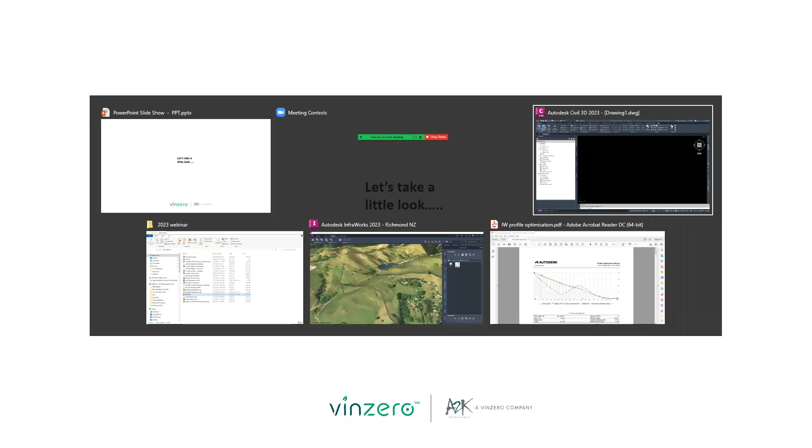All right, and in Infraworks, this command search, cloud credit items have been removed, which is cool, and a few interoperability improvements to Inventor and the like. So we'll go and have a look through those. So let's take a little look, shall we? First of all, Civil 3D 2023.

There has been up till now no ANZ country kit. This morning I checked and there is, so I suspect in the last 1 or 2 days it's been released. So that's great. We've finally got the country kit with all the pipes and things in the background that we're wanting. And there have been a number of updates or improvements that I've been asking for in the country kit itself, not just Civil 3D.

I have yet to go through and see which ones have been implemented and which ones have not. I know already there's a couple I checked that have not been implemented yet. So it's always the case. About half get put in, about half don't of the things I asked for. However, over time, I guess we'll find out what those are.

The country kit though, as far as I know, there's no big changes to that. It's just been improvements and things that have been missed out previously, hopefully that have been asked for by me and other people. So let's have a look at some of these things. The first thing I want to have a look at is pressure pipes. So we're going to cover off the big ticket items first, and pressure pipes is probably one of them.

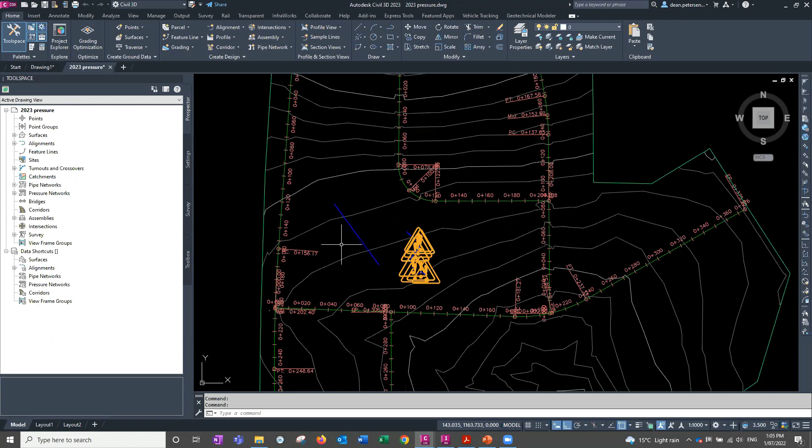pressure pipes. So when we create a long section for one of these, so I've just got a straight series of pressure pipes here. We'll connect it up. There's another one here that is running through. For those who haven't seen pressure pipes before, just quickly, let's see if we can do this.

It creates actual 3D objects, which are solids, and you can cut your long sections and things through them effectively, with joins in the corners. Better join, there you go, which are all your fittings.

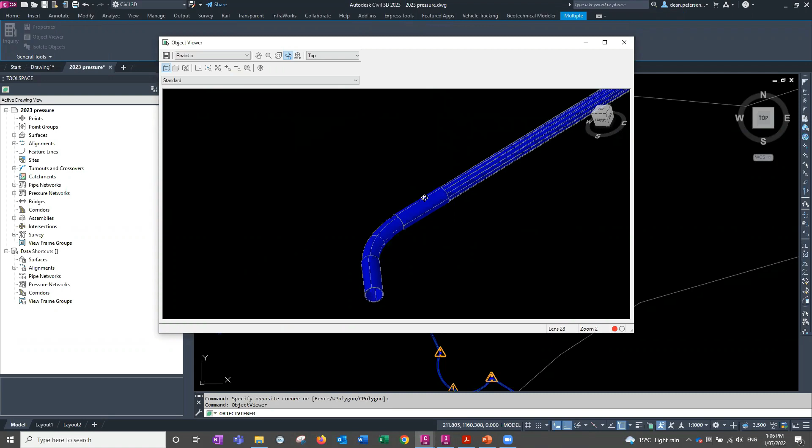If I make a long section out of these, there's a whole bunch of things in the ribbon to work with these. And if I make a profile out of this pipe run, we can tell it to maintain a depth below the ground surface based on just those fitting locations or along the cut length. Now the cut length didn't used to be modifiable before, or easily modifiable. Anyway, I'll show you where they are in just a minute.

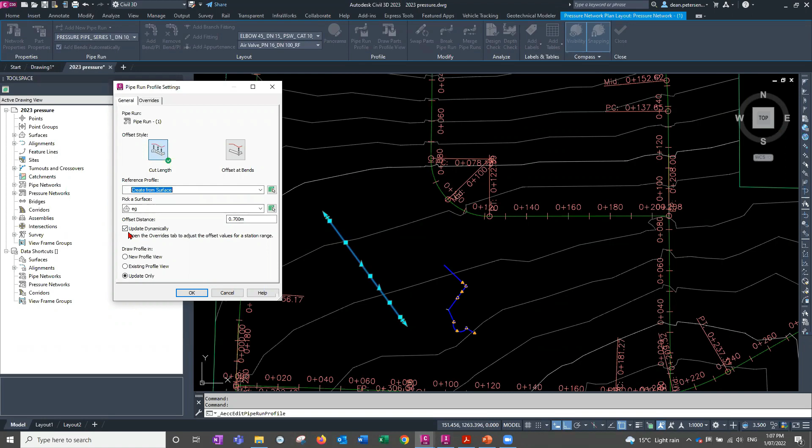So if I make a profile there, it's going to create it from the surface. It's going to be 700 down, and it wants dynamic, and we'll make a new long section. We'll go OK and accept all the defaults for now and pop it over there. So here is my long section for just a pressure pipe.

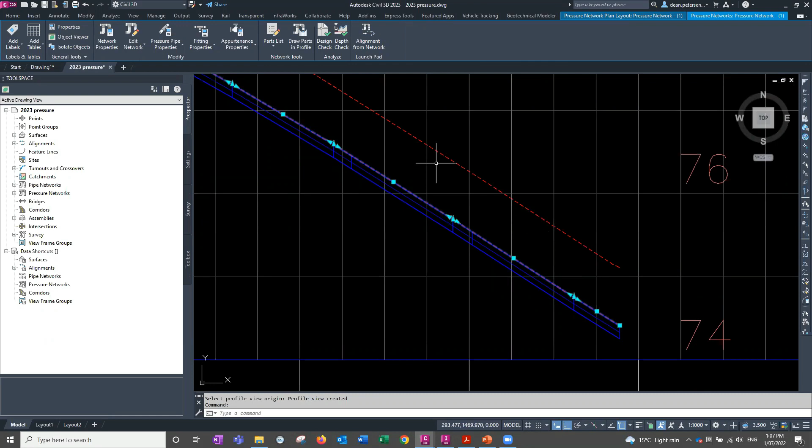Now if I select it, it's working out that 700 depth below the ground surface at the places where the pipe is cut. And there's some fittings and things in here that you're seeing as well. But it used to give you grips all the way along here, or nodes that you could adjust the level, anywhere there was a triangle in the EG surface. So you got hundreds of grips all the way along here.

And when you tried to adjust one of these things, it would often have steps in the pipes and all that sort of carry on, because there was all these other vertexes you were leaving behind, so you had to delete out a whole lot of them. But it's now not doing that, which is nice. So if I pull it down, that's easily adjustable now. What we can also do, which is new, before we do that, let's have a look at the cut lengths, where they are.

If we go into the settings tab over here, the pressure network and the parts list for the pressure network. For each of these pipes in the pressure network, edit it, there is now a, that was a fitting. Let's go back to my pressure pipes, using my PVC pipes. Edit one of these. It's now a field in here that you can set when you're creating all your pipes, or modify it for each pipe size if they're all different.

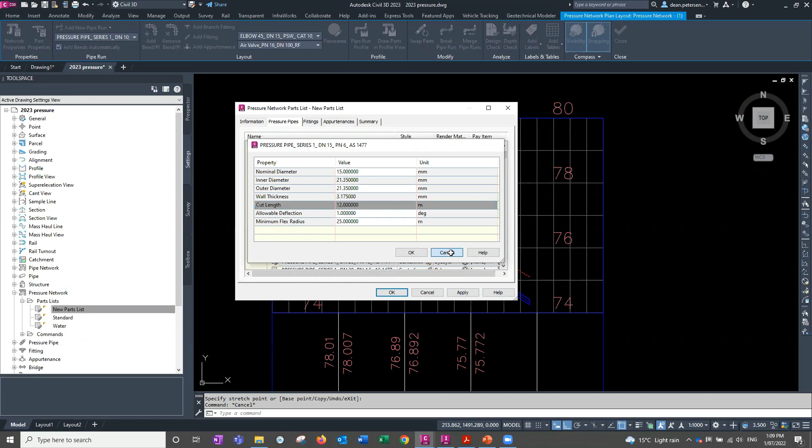Probably wouldn't be that different, they'll be in groups, I'd imagine. So that's where the cut length is. It wasn't accessible there before, but now it is. So that's a goodie if you're wanting that. By the way, all of these pressure pipes you can see me choosing from here are all of the Australian and New Zealand standard pipes.

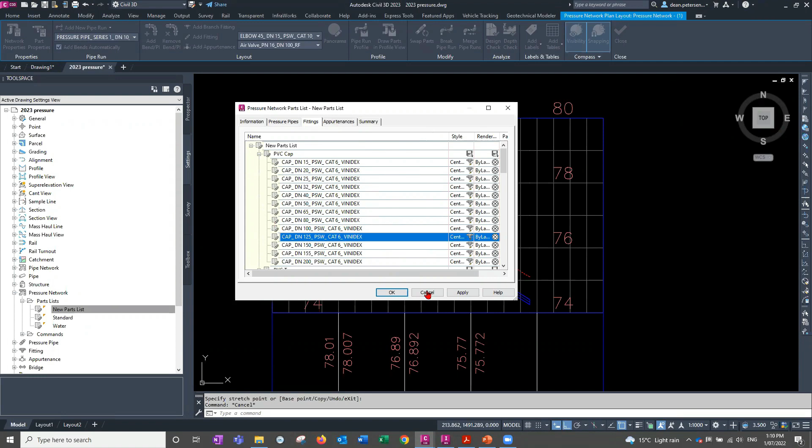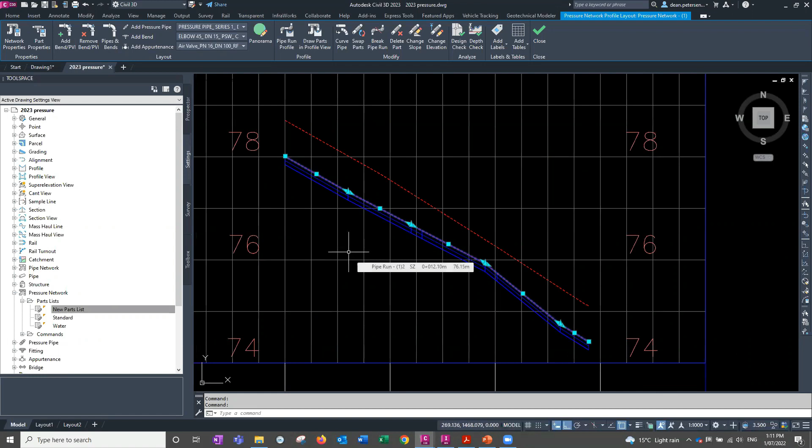All right, so that's the cut lengths. Yes, okay. So previously, if you wanted a step down in your pipes, you could pick the profile that we had, and you can manually grip edit it. You could also define a new depth for a certain length of this pipe. So if it wanted to go down to 1 meter deep rather than 0.7 over a certain length, you could define that. Instead of that now, or in addition to that now, you can actually draw yourself a profile and ask the pressure pipes to follow the profile.

So I'm going to draw one in here, so the depth could be variable potentially. Profile view properties, no, I want profile creation tools. Draw myself a profile in there, call it depth, or depth change.

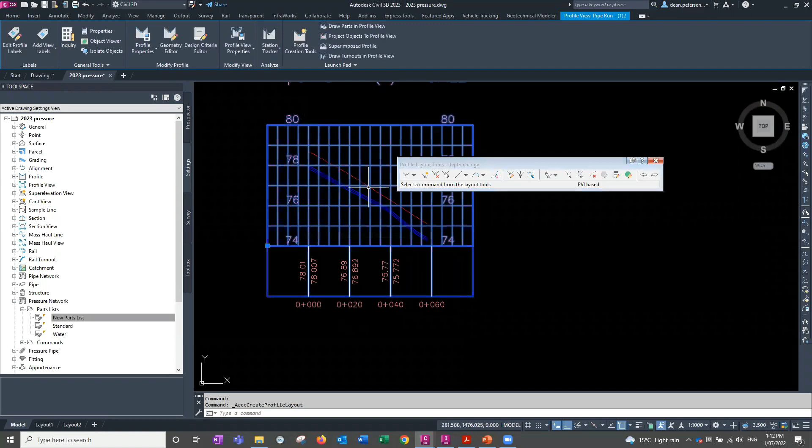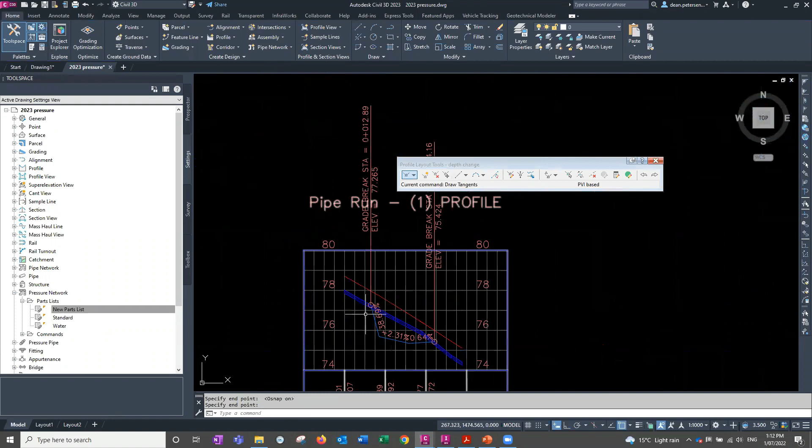Labels are fine. If you want labels, yep, that'll do. Okay, and I'll sketch. I want it to start here to go down to... turn off my snaps would be great. Down to here, maybe come up at an angle so it's non-uniform, and finish on there. All right, so we've drawn ourselves a profile in there. We'd like the pipe to follow that instead of being 700 below the ground surface. So we can draw our own ones now.

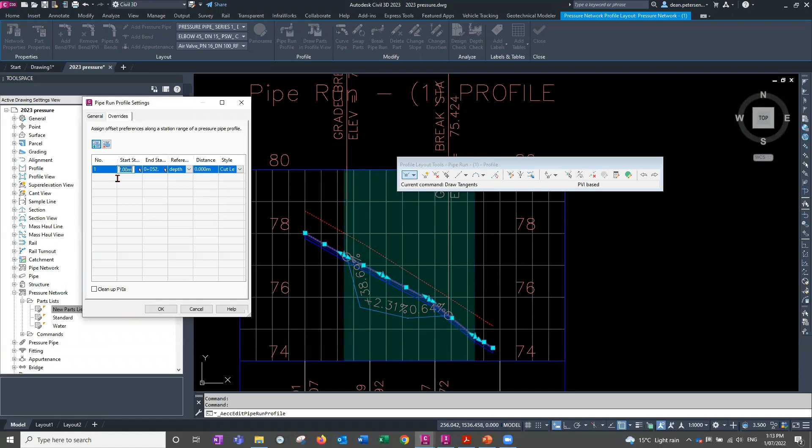The way we add that is to pick a pipe, or a pipe run that is, go back into the pipe run profiles tool, and there is an override tab. This is where you could specify different depths before. Now we can actually tell it to use a different profile. So in here, it's the reference profile we want it to follow. That's the depth change one I just grabbed, and the start and end point we want it to look for will be start point here, end point there.

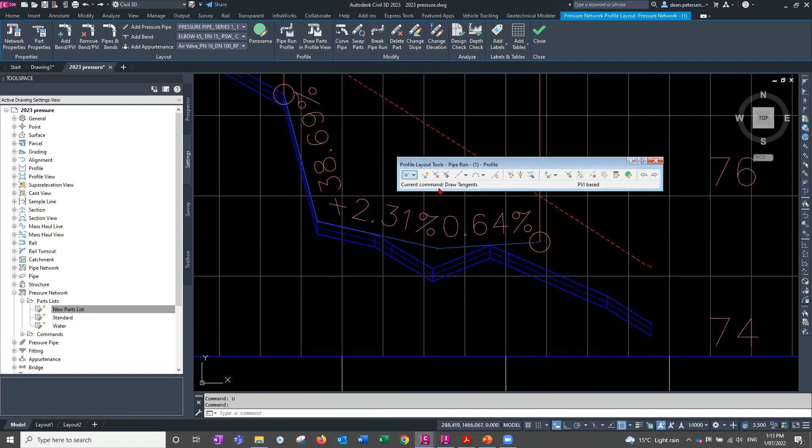Okay, and you'll clean up any PVIs that were there before. Go okay. With a bit of luck, it's actually stuck to that new profile that we sketched in or drafted in very carefully. It should be dynamic to it as well still. Yep, it is. Well, actually no, I missed it. I'll do that. Try moving this instead. There we go, it is. Except where you manually grip edit it off, the manual overrides it. Okay, so we can now follow a profile we've drawn instead of just a depth change.

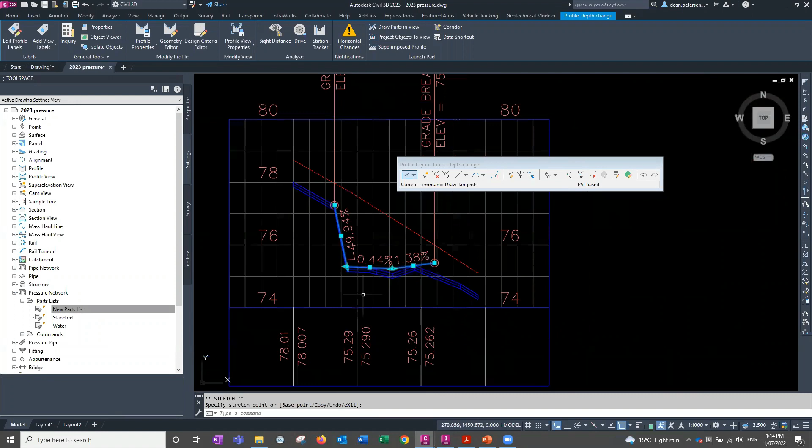The other goodie in here is the ability when we're editing or changing one of these pipe runs, to come up here, and when you're looking for a pipe to add, the ANZ Australia New Zealand standards have thousands and thousands of parts. You can search the field now. So when you click on that drop down, the drop down becomes search by keyword, and I can type in here VIN, and that will find all the Vinidex pipes. I can type in 100, and that will find all the 100 diameter pipes in the list. So that makes it much, much easier to use a large catalog like this one. It's 7,000 parts or something in this catalog.

So the search field there, the tricky bit is, where's my search field gone? I expected it to be down the bottom of that list or something. It's not, the drop down changes into a search field up the top, right up there. Okay, I think you might get the same ones in here. Yeah, you can search in here as well to find all the Vinidex for the fittings, for instance. So that's actually a big help.

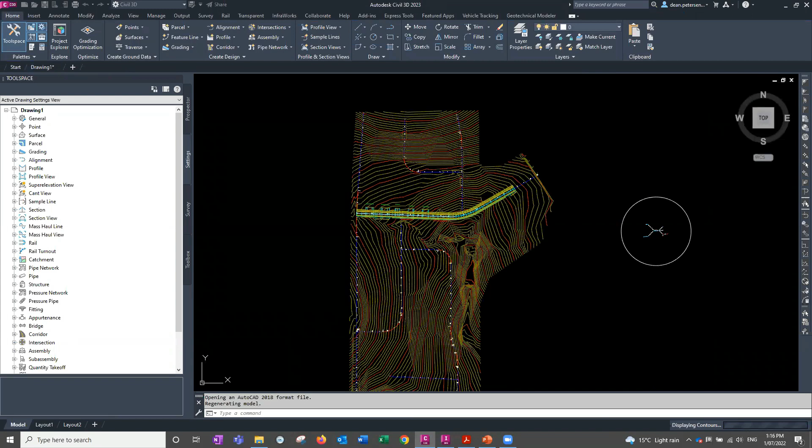I'm going to close that one. I might as well go yes. And I'm going to open another drawing called corridor targets, hopefully. Which one was I going to do? Targets, that one there will do. Okay, so in the corridor targets, for those who haven't picked it up, if you're not using either 2022 with the latest updates applied or 2023 yet,

the targeting dialog box has changed for a corridor. So if I pick the corridor here, go into edit targets in that region, enter, this is what it now looks like. So there's two tabs in the middle. There's a surface tab on the right, which is where you'd set all your surfaces for things like your batter slopes, daylight minimum width in this case, my batter slopes. And there is a set all for each of those on the side here. These are usually mandatory. And there's also the old set all button up the top, where you can set all of your surfaces for all of them at once, which is good. That wasn't there to begin with.

The optional targets are in the offset and elevation tab. Now I'm still getting my head around this dialog box really. Some things are better than the old ones. Some things are less clicks really. Some things are, yeah, it's going to take me a little while to get used to them.

But what we can do is with our targets for, say, our lane super elevation there, if I want to change the width target. Now, if I want to, it's done subassembly by subassembly. So that's the width target for it. That's the elevation target for the same one. They're just up above each other. It changes the panels down the bottom.

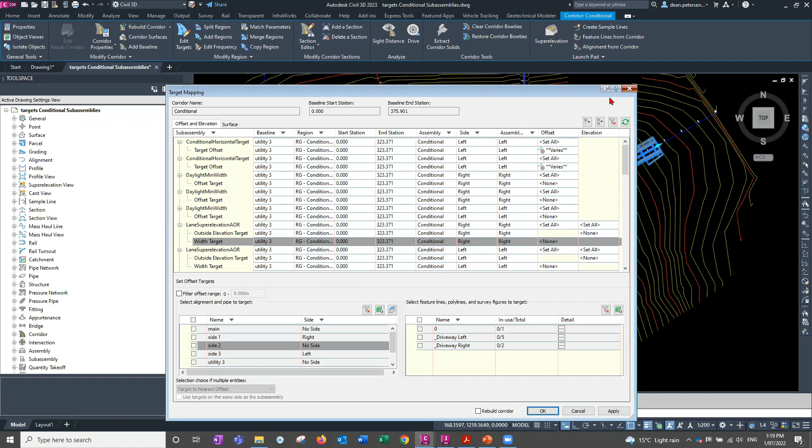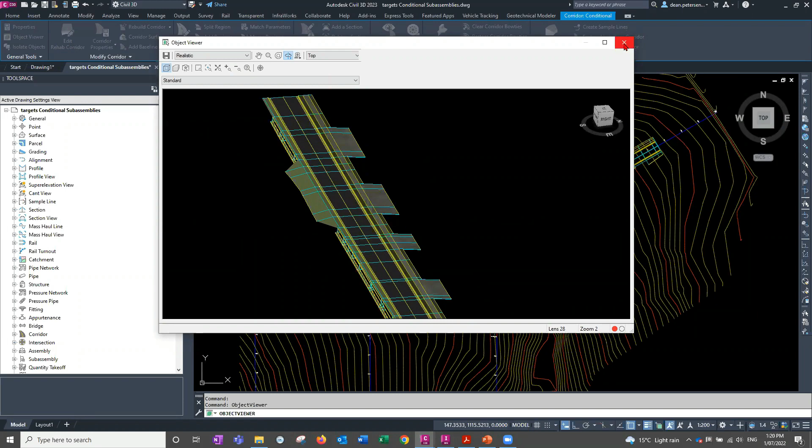The other thing in here is if anybody is using the targets for the horizontal conditional targets. So if I have a look at this object viewer, this particular corridor has been built such that where I want it to, I didn't save it after I made a change, never mind. Where I want it to, it's putting these stubs for driveways to attach to the corridor. How it's doing that is a horizontal conditional target.

So there's branches in the subassembly, and it's looking for a polyline drawn off to the side of the corridor, and that's where it's putting in the driveway stubs. So these are dynamic to the line. So if I want not a double width driveway, a single width driveway there, my corridor, if it's on rebuild automatic, will rebuild.

Previously, if you added a new polyline into here for a new driveway that we forgot about, it would do this. It would just not update, and we'd have to go back into the targets, reset that layer. Now, it's still not completely 100%. It's supposed to just do that automatically. If I do a regen, it doesn't do it. If I rebuild the corridor, it still doesn't do it. I don't believe, but it should, I think. So there's still a wrinkle to iron out there.

Yeah, but the wrinkle can be ironed out if you just move one of these existing ones. It suddenly happens. So it is just a wrinkle, and you could move that obviously back to where it was, the width that you wanted, and you're good to go. So little trick in there, but at least you don't have to go back in your targets and reset everything. You can just draw new ones. Deleting works as it did before. Okay, few little things in there. That's lots of fun. If you want to know how to do this, that's part of our advanced Civil 3D course. All right.

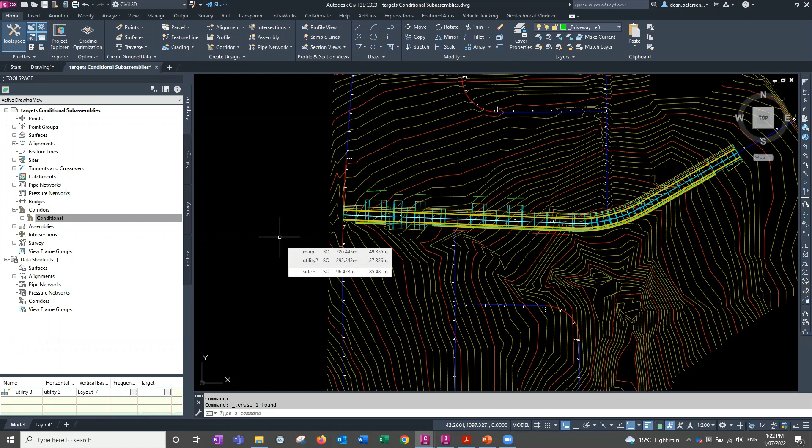Next. So, yes, okay. We might change drawing here, I think. If you're extracting corridor solids from a corridor, close that one. There's a couple of little improvements being made in that. So let's go solids. This one here, property sets. So when you extract your corridor solids, there has been the ability to attach property set data to that extraction.

So if I pick my corridor, up in the ribbon, it's this button here, extract corridor solids. So that's to take it out to things like Navisworks and the like, take your corridor out, and then you can do clashes off it if they are solids. So it wants me to select the regions to export. I'm just going to select that. It's just one big region, and you can color them up and give them names and things like that.

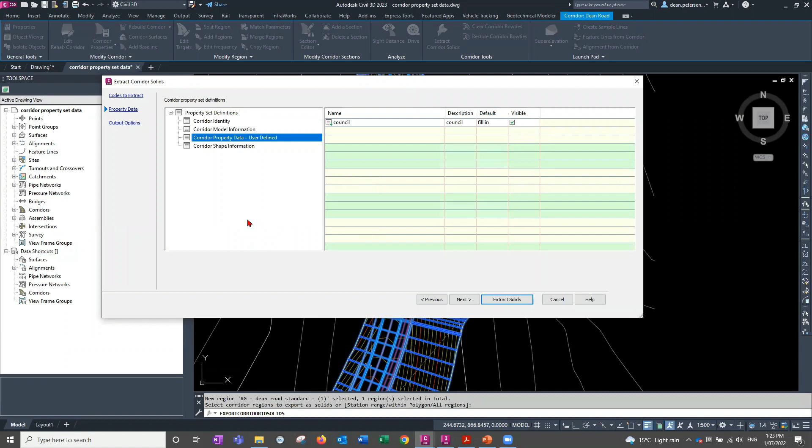However, in the property data tab, they've added some additional things in here. Some of these handle ones are new to get the corridor handle and the assembly handle. The handle is the number that the computer uses to recognize it by. And I think a couple of others as well. You can make your own user-defined data as well, if you want. That can be added to the property sets when you export it.

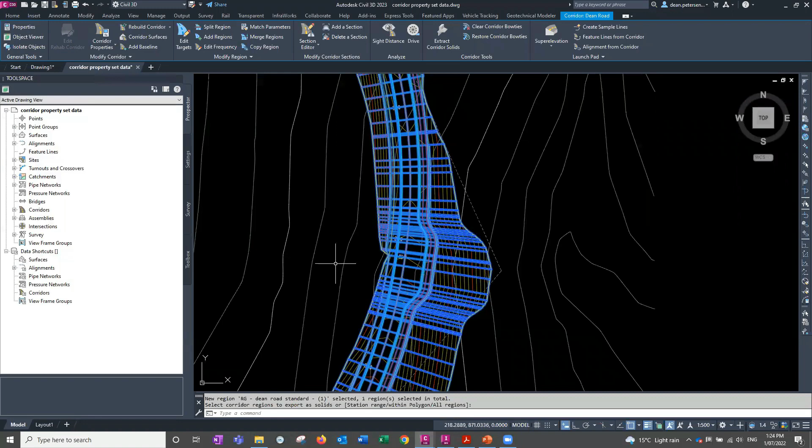Finally, when you export it, you can go to a different drawing if you want. I'm going to insert it into the current drawing, and I'm going to maintain a dynamic link to the corridors. If the corridor moves, the solids do as well. And I'm going to go extract solids. We've done that. There are all the corridor solids that we have. Select similar. And they're just AutoCAD solids. Look at them. So that's all as per normal.

What they found though, and what somebody's obviously complained about, is that in the properties of these things, so I'll pick one of them. Control 1, bring up the properties.

In the extended data, that's where all that information comes through. So you could, for instance, go and change it, whatever the council should be, the owner for this road, council. We get all these handles in here.

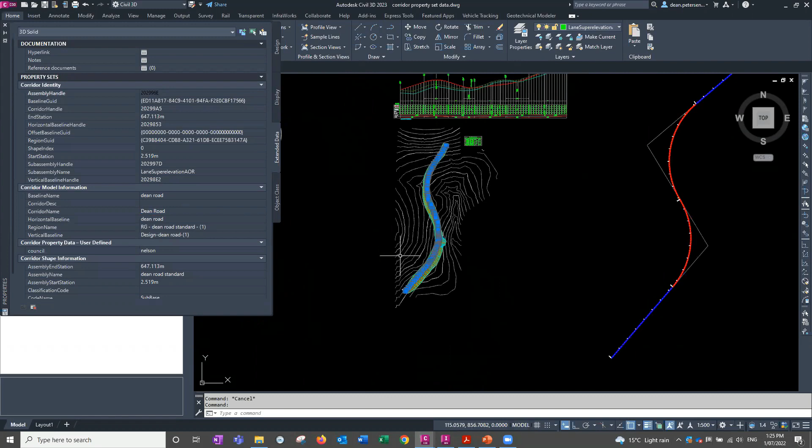Now, the thing that happened apparently in the older version is if I changed my corridor by changing the length of the region, for instance, or splitting the region, and then the solids updated, the handles would all change. So apparently that doesn't happen now. The handles remain the same that are reported in the extended data. So somebody must have asked for that to happen.

It's not a big change for most users, but that's the little improvement they've made there if you happen to see that. If you haven't seen that before, that's the way to take your corridors out to Navisworks. And all that data goes out to Navisworks as well. So your custom properties will go that way as well.

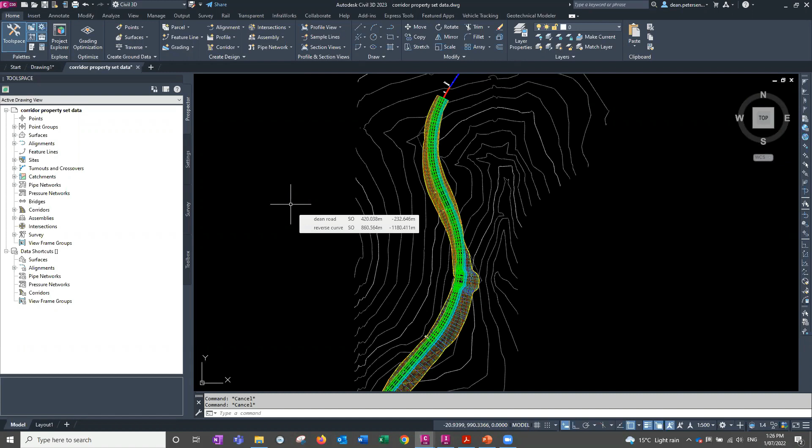All right. Yep, no, that's all we wanted from there. Next. Let's close this one. Going through to the next drawing, which is Project Explorer.

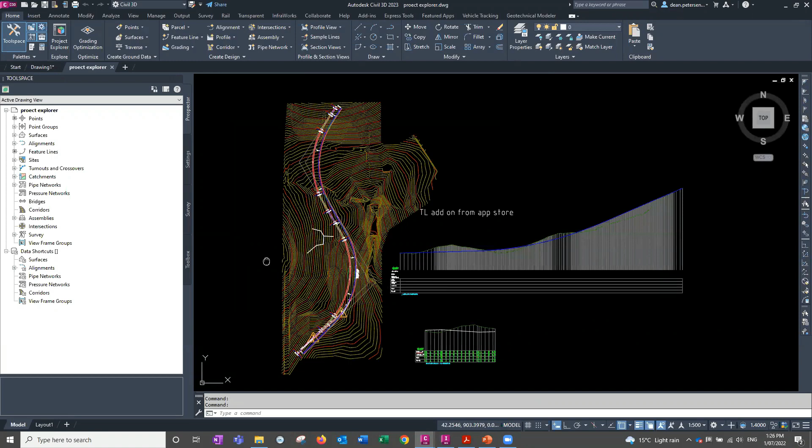All right, so hopefully most of you will have seen that there is this thing called Project Explorer, which opens up the database of the drawing and allows you to get reports and actually change the drawing through that interface. So in the home tab of the ribbon, it's Project Explorer here. What I have used this most often for so far is comparing one thing to another. So as-built as compared to the design drawing, for instance.

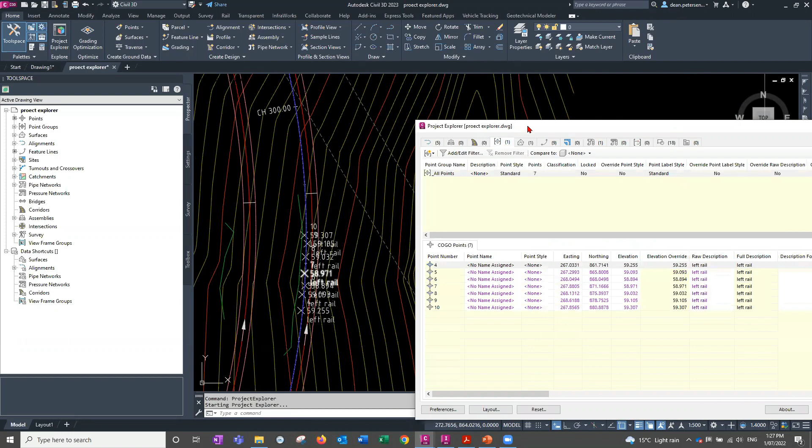So in the background here, zoom in on it, I've got some survey points, like for an as-built. This is for a bit of rail. And you can compare those points to other things. So for instance, looking at the points here, you can compare that point group to things like alignment. So the alignment that that rail was supposed to be following, you can see how far out of tolerance it is.

This is the new part. You can now do the same compare. It doesn't have to be an alignment or profile anymore. It can be compared to actually feature lines. So if we compare it to, say, the test one, previously these columns at the right-hand side would have all been 0, 0, 0. Now it's giving you a compared X and Y offset, or the closest offset to the line, and a Z elevation change.

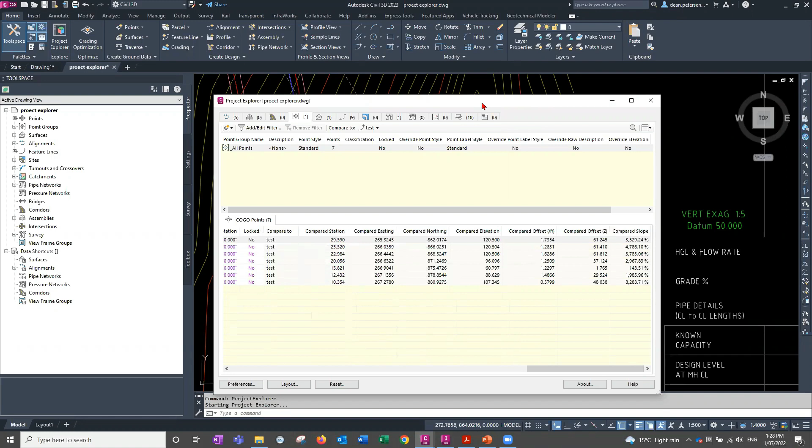I must have snapped my, I know, I've been playing around here and changed my elevations. Let's try a different one. Let's do the test one. There we go, that's better, they're closer. This one's way up the hill, this one here, but it's 2 and 3 meters different from the points down the bottom here. Well, let's drape this on the ground surface. Let's see if we can get something better. That one there. I'm going to redrape it.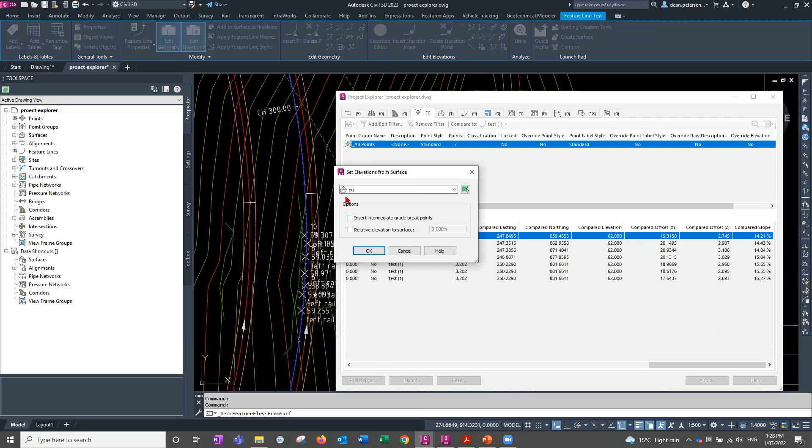As you can see, you can leave that as a modeless dialog box. You can leave it set up and modify your drawing in the background. Go OK there. And compare it against test one. Test. It is, or should be, dynamic. It should be. I need to give it a nudge. It's not playing ball now. It's not updating this. Let me just close that and start again.

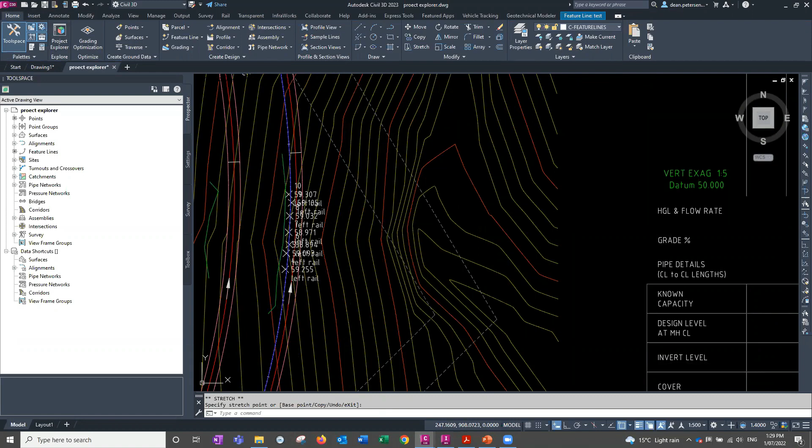Might be because I've got the webcast running, but when I was using that before, it was all dynamic, and I just moved the polyline and it would update. So we're comparing it to, sorry, the feature line, I should say. Test. There we go. That's what I would expect to be seeing, because I draped it on the ground surface. It should be much closer to those points now. I had to move this just before the webcast, so maybe that's done something.

But if we look at what point number is that? Point number 8. It should be one of these ones down here. It is third from the bottom. If I move my feature line now and don't snap it to things, no, it must be because I've got the webcast running. It's interfering with it. It does update dynamically when you don't have other things running in the background.

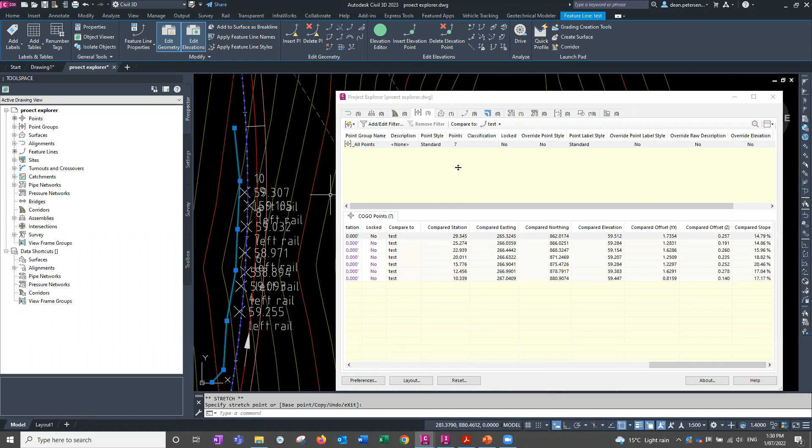The table rebuilds itself every time I make a change, and that's what it should be doing. It's just not going to behave now, is it? So that's what the new thing about the feature lines compared to points is.

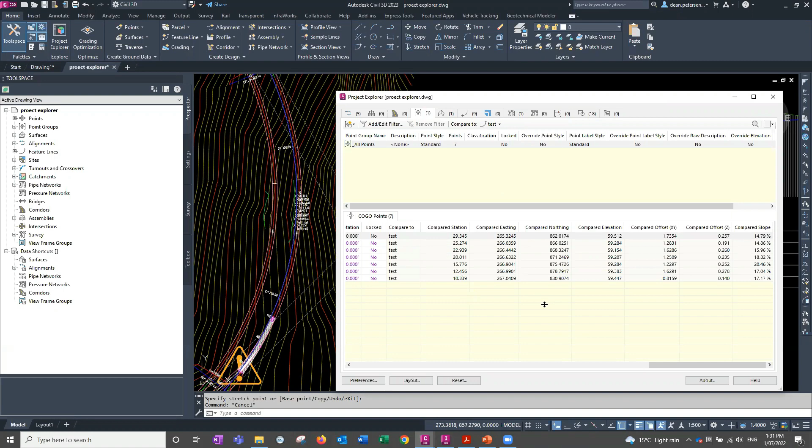The other thing is totals. They didn't have the ability to total some of these tables before. Some of them do now, so for instance, the pipe networks.

In the layout here for the table for the pipe network, you can go into the layout and there's a few options you can turn on, for pipes. Setting the column layout for the pipes themselves, we have this show total cell option.

So for instance, we might want for the pipes in this particular network to show the total 3D length center to center, and the total 3D length to the inside edge of the structures.

If we go to our pipes tab now, we've got down the bottom here the 3D length and the center to center and inside edges of each pipe being reported out.

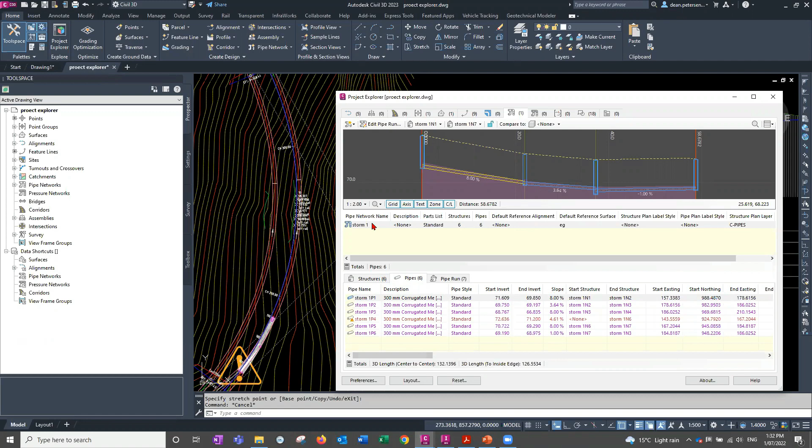If we report the whole thing out to a file, to Excel for instance, I'll just keep it the same format as this, the default - you can make your own formats. Put it on the desktop, actually I want CSV, save it, and go have a look at it. When you export it to Excel, you'll get the total columns as well.

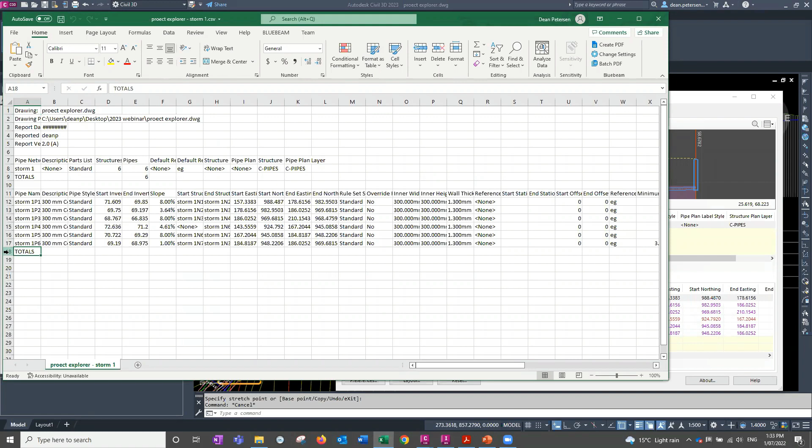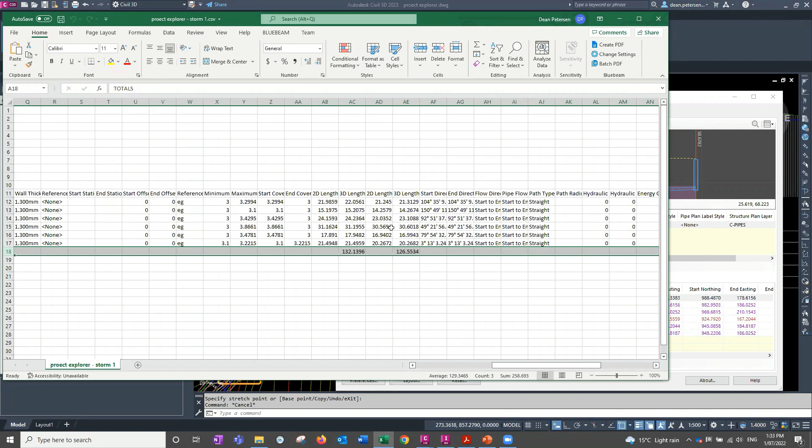So here's a total row down here, and if we scroll along, there's the ones we've asked for. It doesn't happen for everything, but it is possible on some of them - mostly going to be the length columns for the various items.

Okay, cool. How are we off for time? Getting there, but not too bad.

Grading optimization - I have done a webcast of this sometime last year. Whoops, I just closed my Civil 3D, didn't I? No, I didn't, I just got out of there. Okay, I think I'm going to need this one up in a minute, so I'll leave that there for the moment, but what I'm going to do is go and open a new drawing.

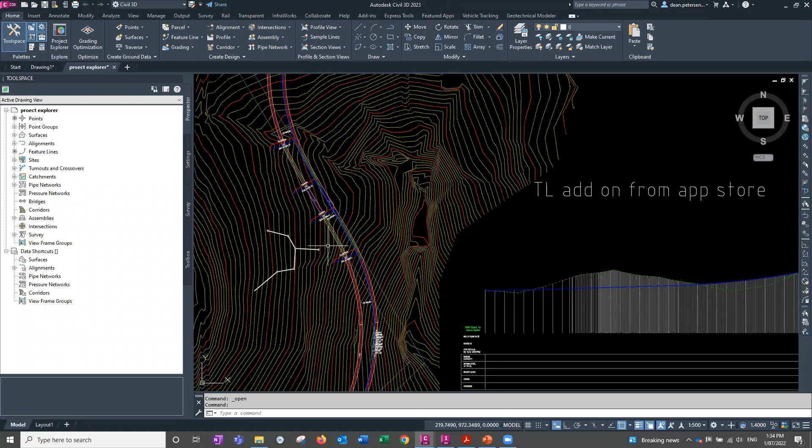Actually, I'll do this one now while I'm here. Let's get out of here. We're getting on to the smaller extra features now. For those - there's not probably many people using rail, but there's a couple - for a rail, you had these cant symbols you could put on your alignment.

I hope I saved this. You can pick your alignment now and you can put in a new label, which would be a cant information label, and I've made just a little style here that'll do a demonstration. Now you can pick a point anywhere along the alignment, and it will give you whatever cant information you want, that you specify.

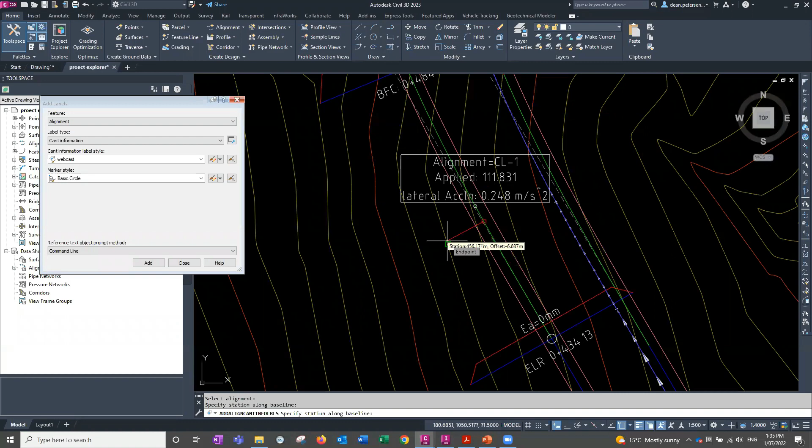In my case, I put the applied cant to be shown in the label and the lateral acceleration calculated at that point. So if I come down to somewhere in the middle of my bend, I can click in there and put another one, which is good - never had those before.

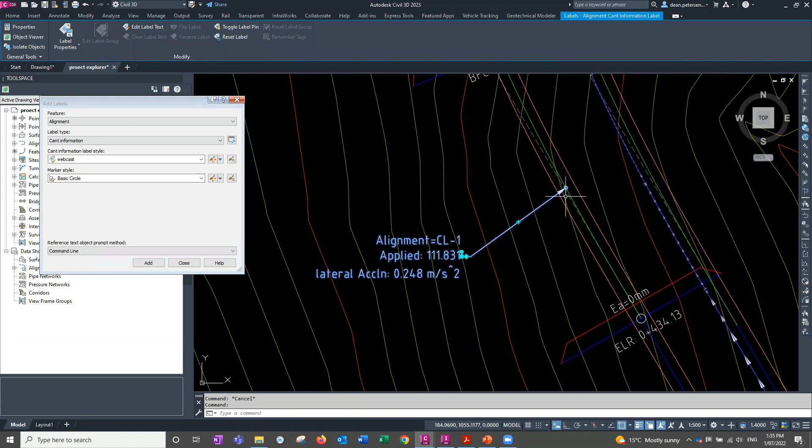You can drag them out the way, of course, and make them look a little better - I haven't spent time making up a style for these, so it's just the default style. The one thing it doesn't do is give you a grip so you can drag it along the alignment - that would be nice. So they're not really dynamic at the moment, they just go on to the point that you've chosen.

However, you can see that there's a 225 cant there at the moment, 0 there, and 111 in between at the point that I chose. So a little improvement for those using rail.

The rail things - there is one other thing that won't really affect us very much in the rail, which is in the catalogs. They've put in some additional American catalogs in here, but that's not going to affect us at all, this part of the world.

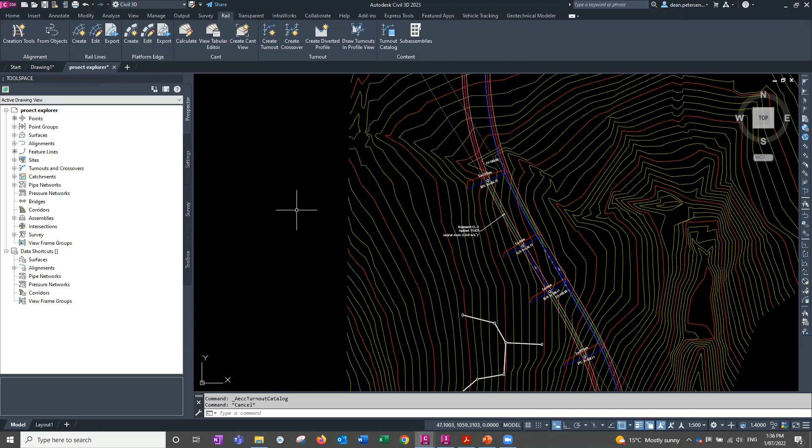Okay, I can close that one now, I think. Let's go - okay, yes, let's go and have a look at the grading optimization, so another one of these. So for those who haven't seen grading optimization yet, this might blow your mind.

I did do a webcast on this about a year ago, and lots of other people have as well. So basically, you define these areas.

Grading optimization is a button in the home tab of the ribbon. It'll tell you that you've got to load it up, so you need to go to the Autodesk website and download it. It's a new thing, relatively new, a couple of years old, and it's free.

When you load it up, it goes into the Analyze tab in the ribbon and over here on the side. So basically, you define some grading objects in your drawing. You've got all these building pads and zones with different grades and things on them.

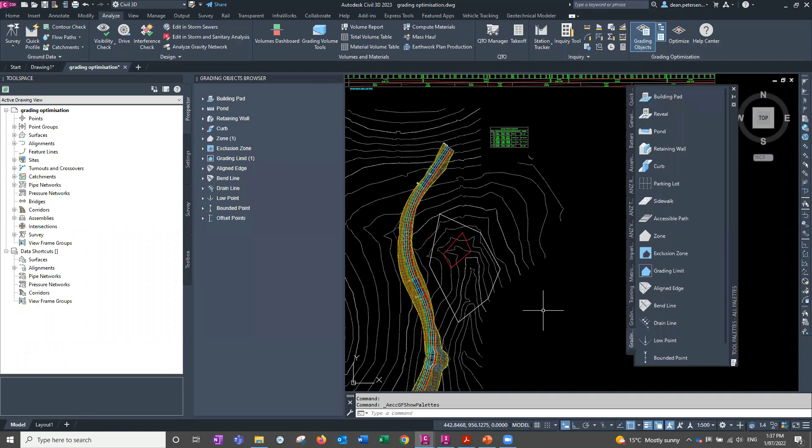So I've made a zone there, and for that particular zone, which is my platform that I want to put a house on, it's got some percentage values that it's allowed to run between, and I've put the same out to the edge of the property boundary. I've given another zone with different grade values.

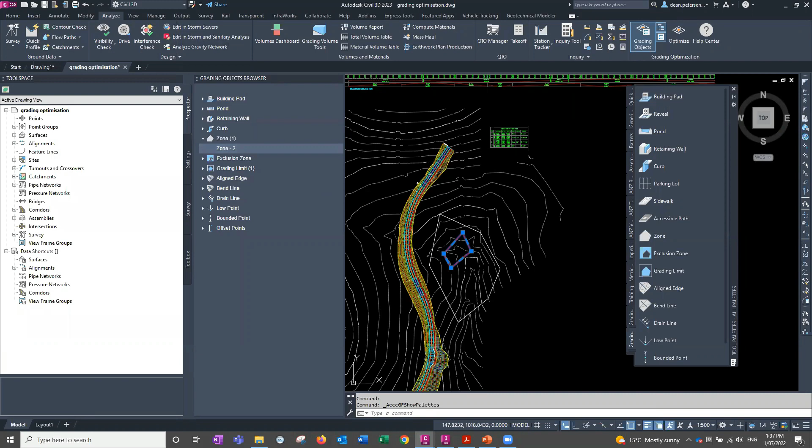Customize - oh, that must be zone 2. Okay, I'm not going to go into that too much at the moment. Zone 1 is my property, but go and have a look at that. You can set your buildings to be flat, and you can put car park areas and all sorts of things into the area that you want to analyze.

What it does is, once you've done all that, I'll close that and get rid of this.

Okay, you can go and optimize it. So you click on optimize. It wants to select a surface to use as the existing ground. I'm going to use just my EG.

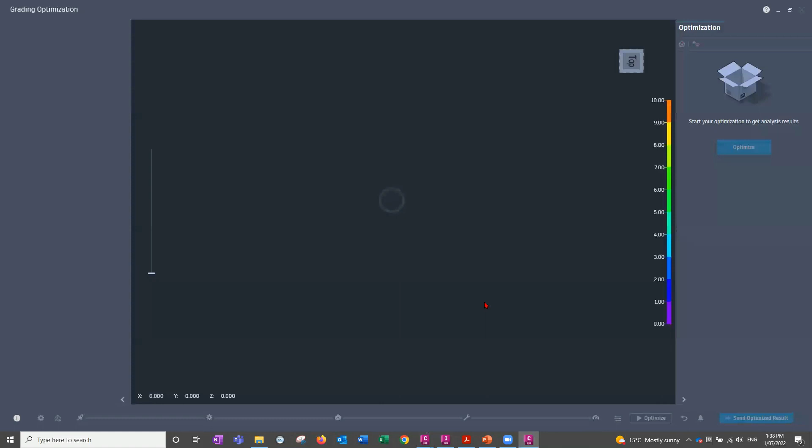It'll open up this panel. Two things: one is they've put in some help features into here, so as you're working in this panel, you get some help information down the side. So here's my zones.

It changes depending on what you're doing in here, so it'll give you some information on how to use this thing and what you're doing. But probably the slightly bigger thing is when you're ready to go - escape there, close that, click on optimize.

Watch what happens down in here when I do that. It's going to change my ground surface and start working on the contours. If I turn one of these on to show my cuts and fills, it's optimizing the area in there to have the minimum amount of cut and fill to achieve the results of grade and height.

And other things that I've set in there to make one zone work in relation to the other. It's all still optimizing at the moment down the bottom. They've put in some extra interpretive icons in here to tell you how far through the process it is down the bottom, so if it fails at some point, you can tell where it failed.

It's also given you some extra information here around the progress chart - is it likely to get to a solution? Yeah, it looks like it will. Or if things weren't making sense, it would stop at the red review needed stage. So they've made a few little changes and improvements in there.

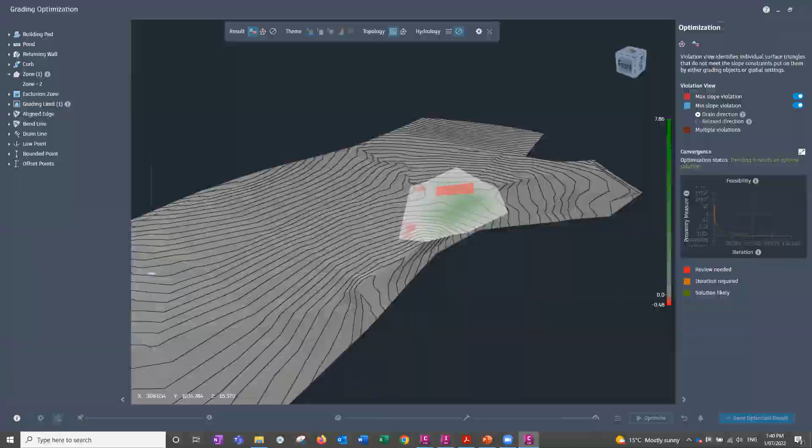The thing that they've changed in here is that when it needs to bring feature lines back, there were some issues with those crossing, I think, in the past. They've resolved some of those issues, so that's another little thing that they've changed.

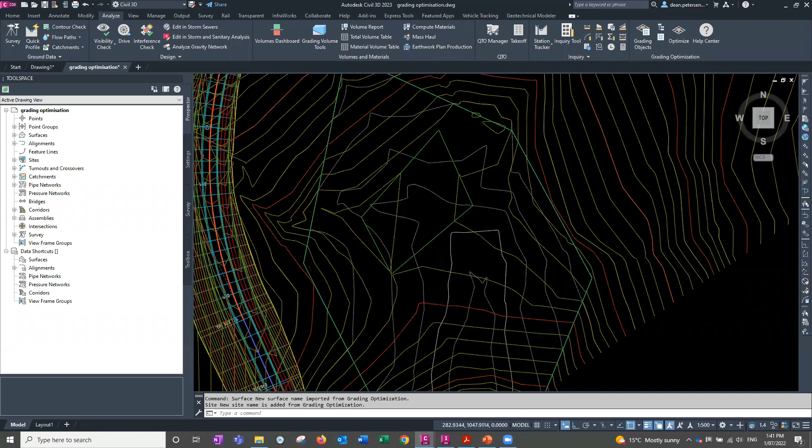If you're using this, you can go finish, and it gives me my new surface as a start point for me to continue my design, but that's what it's found - gives me the amount of cut and fill to achieve the results that I asked for.

All right, so that is grading optimization. There's lots of webcasts up on YouTube, not just the one that I did, that shows you how to use that.

Okay, a couple of other things. There is section view speed - when you have a drawing that has cross sections already made in it, that has been improved a little bit. I did a little bit of a test, and I think it's probably maybe 25%, maybe 30% faster than what it was before when you do a regen with cross sections in the drawing. Not a massive change, but it's something.

There is a drawing transformation button. If you're trying to transform a drawing, let's see if I can open one.

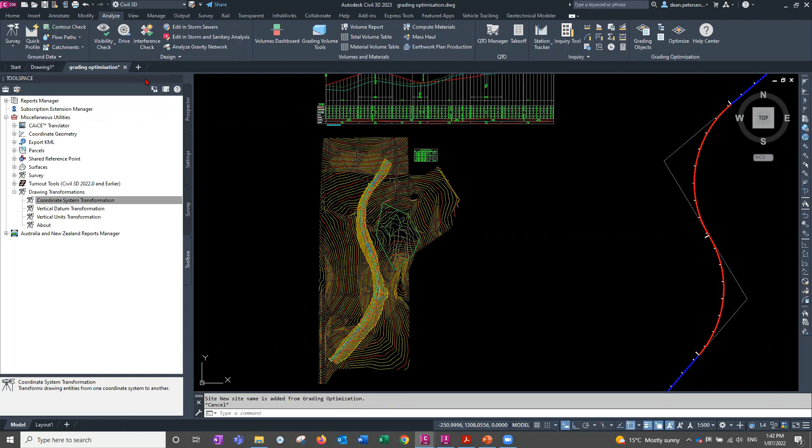That one had a coordinate system assigned to it. You couldn't do it with civil objects before. It is still a work in progress, as I understand it. I have had it crash a couple of times, so we'll see how it goes this time. How are we off? I think we're okay.

So it's in the toolbox in the tool space, under miscellaneous utilities. I think you have to load this one, I don't think it comes by default. You have to go and find it on the Autodesk website, it's a free one. But if I go to coordinate system transformation...

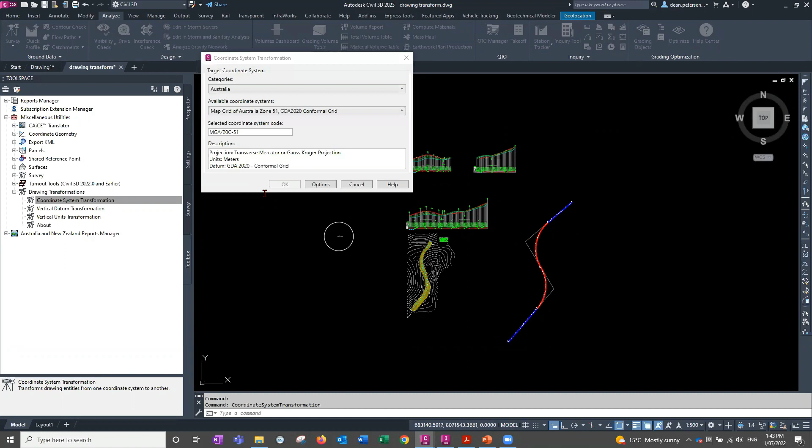It comes up with this dialog box. That's what the drawing is currently in. So it's in zone 51 GDA 2020 at the moment, if I wanted to take it back to zone 51 GDA 94, fingers crossed it'll work. Go, okay.

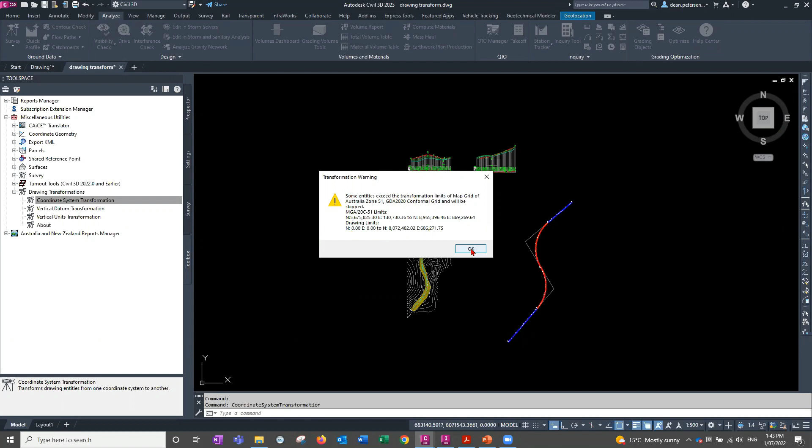It tells you some things couldn't be transformed because on the drawing they were outside the limits. I'm not sure what that is, it could be an XREF I had attached or something like that, or it could be this site. But in any case, it gets most of these. Transform the model, okay, and with a bit of luck it'll work this time. As I say, I have had it crash, but okay. It gives you a nice report, so anything it couldn't move, it will let you know.

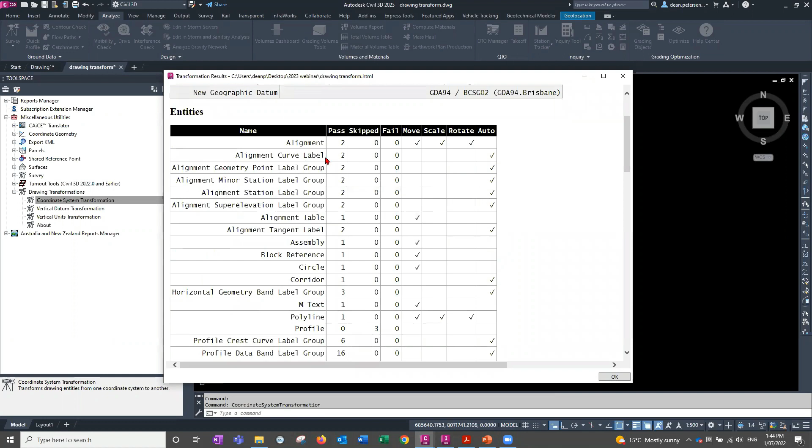These ones that have got the ticks are the things that it has moved. So it looks like some of the labels should auto move if the object moves. You can go through and have a look if there's anything it's missed and try to move it yourself potentially. But it looks like most of them have worked in this case, which is good for me.

I've skipped 3 things. What does it skip here? Oh, it's a profile. Some profiles you need to go and check, make sure they haven't moved in relation perhaps to the long section, but I think they should be okay. It probably just hasn't moved the long section either, I suspect.

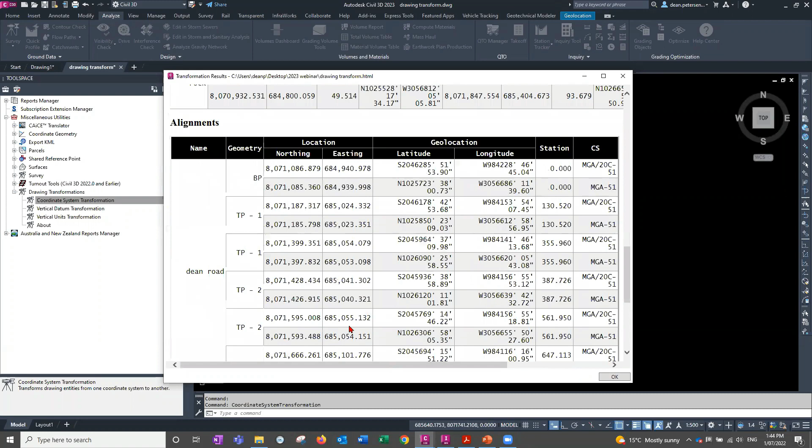And then it gives you a report of the objects that it has actually moved. Cool, all right, so that's nice. As I understand it, it doesn't do everything yet, but it is nice that that's there for the civil objects now, which you never had before.

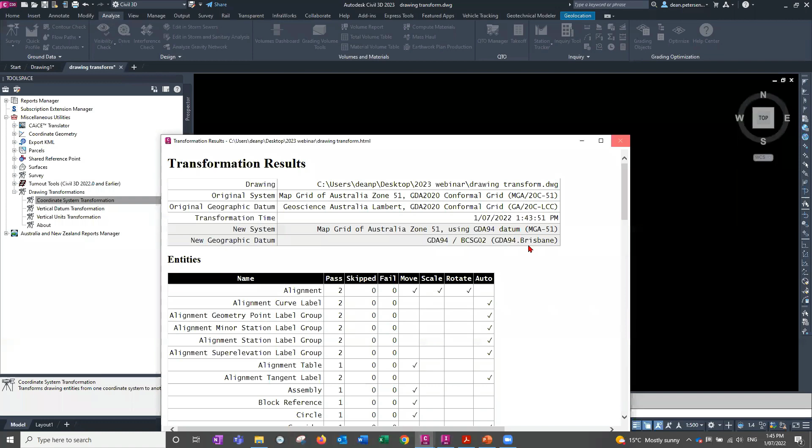All right, finally, if I go back to the PowerPoint, there's one other thing in the subassembly composer. For those using subassembly composer, and that'll only be a few of you probably, I've done a webcast on this, lots of other people have as well, if you need to build your own subassemblies. It's this thing called an auxiliary curve.

We had auxiliary links, which are straight line segments, basically a sketch line or construction line that you can use for building other things. There is now an auxiliary curve. So it's not going to make much difference to most people, but for those who like to use the subassembly composer, that's a goodie.

All right, that is pretty much through the Civil 3D stuff. So I wanted to go and have a quick look at Infraworks. There's not so many Infraworks things, but...

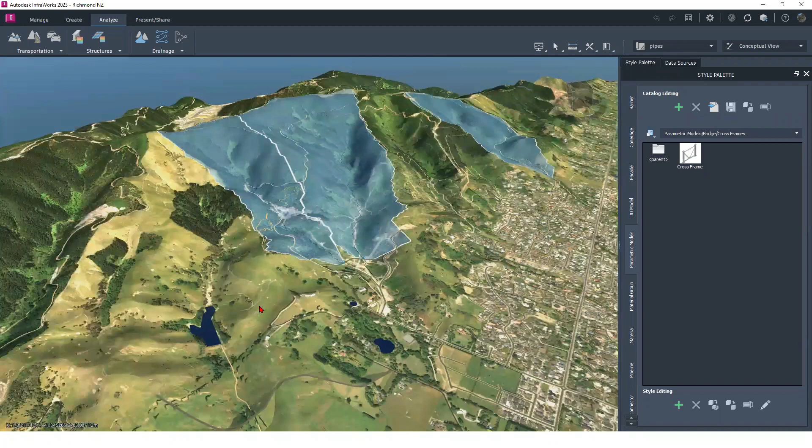The big ticket item in here is going to be the removal of the cost for doing things like these watersheds. So the watershed was under drainage, I think, and I'm not going to do them live, it takes a few minutes to go send it away to Autodesk and come back again.

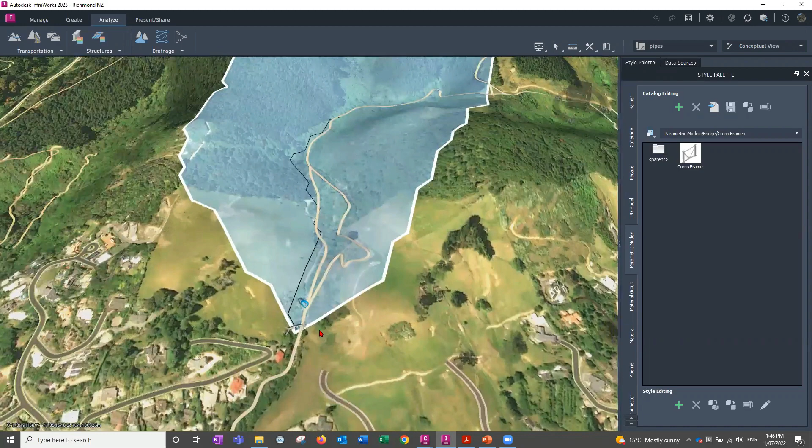You click on watershed and you pick a point down the bottom of a gully, and that's what I've done for this one. It will go up and work out the contributing area to the creek in the bottom of that gully. It will sketch in approximately where the creek is in relation to the surface, which is the black line given here. And it actually works out, if I look at the properties of this thing, a flow for, in this case, the 100-year flow.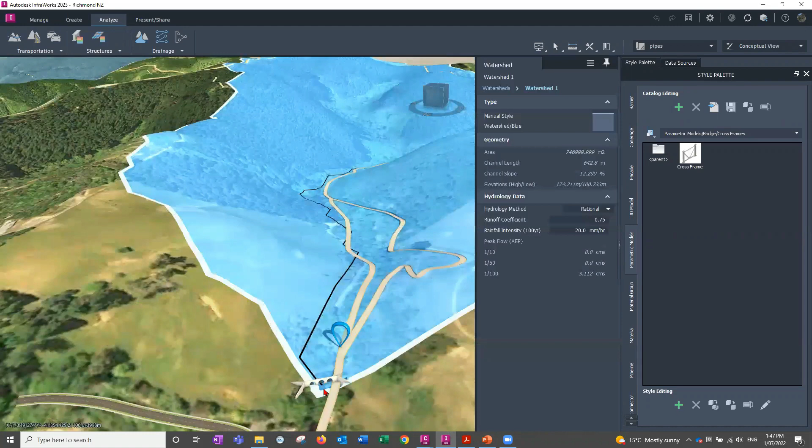Depending on the numbers you've put in the background for the hydrology method that you can choose. So that's quite nice. And if you put a culvert on that black line, it actually picks up the flow from that line and puts it through the culvert, and then you can analyze the number of pipes you've got, for instance, for the culvert, which is a goodie.

So if I zoom in, you can see it's running sort of half full with those size pipes. I could say change my, nope, can't change the pipe size there, I have to do it on screen, or perhaps change my number of barrels here down to 2.

So it should recalculate it. There it goes. And see if I can get away with just 2 pipes instead of 3.

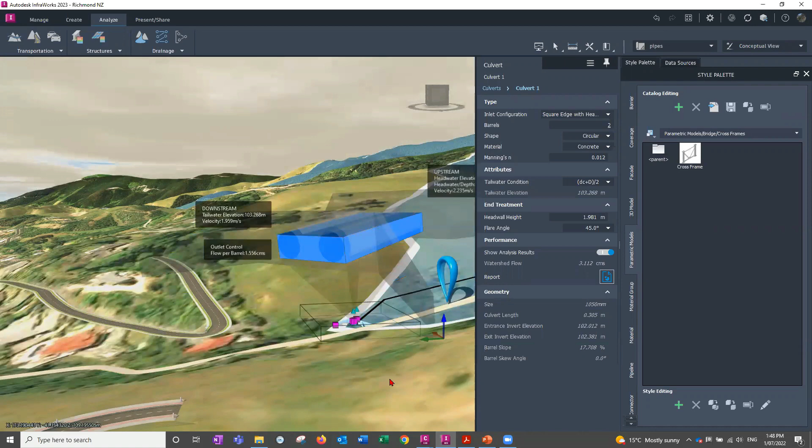Or maybe just. I'm not getting a step in this, but it's quite a steep bit of culvert, that one. But all the culvert tools that we had before, that's all the same. It just happens to pick up the flow. So that's a nice one.

Also, previously when this used to cost about $60 or something to do one of these, people would just take it out to Civil 3D, you know, export the surface and do it in Civil 3D. But often if you had a LiDAR surface, that would be very, very hard to do because it gives you tiny little catchment areas all over the place because the LiDAR surface bumps up and down dramatically.

This does more of a, as you can see by the shape of it, it's actually converting it into a grid surface and smoothing out the surface to work out the catchment area. So it's much better for large areas and large detailed surfaces to just go out and give you a catchment and give you a good solution.

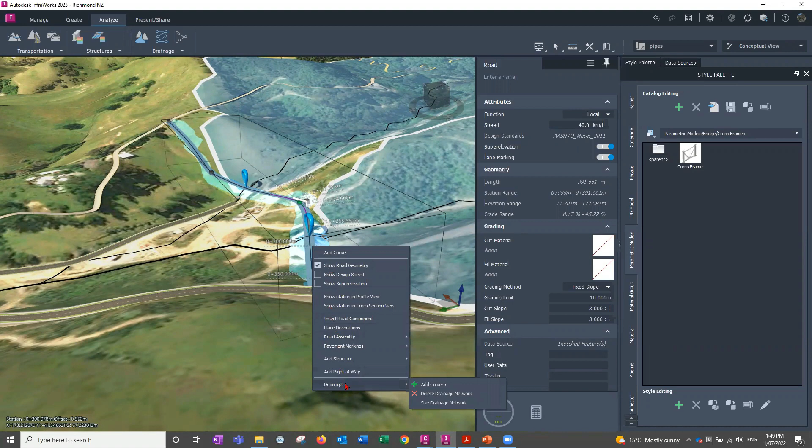The same thing can be run on, and I've done it over here, and this takes even longer to send away, so that's why I've done it for you already. On a design road in here, you can right click on it and go, where is it? Right of Way, drainage, and oh no, sorry, it's not that. It's the same tool as we used to pick before,

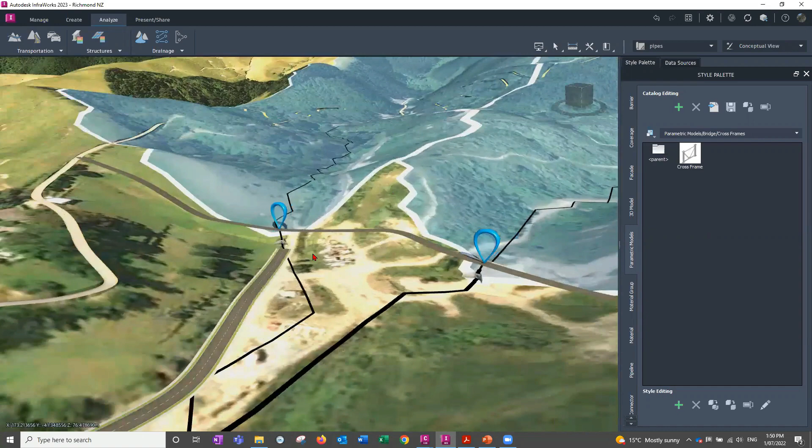but instead of picking a point on the ground surface, you pick a design road, and it will look at all the catchment above that design road, find the creeks that run underneath that road, and missed this middle bit, probably because of the conversion to a grid. And then you can put a culvert on each one of those. So there's a culvert down here, with a nice little flow through the pipe represented there.

Would have cost you another $60 before. So now that's all been removed and it's all free. Just comes with your license now. The other thing that used to cost was the optimization of a profile. So here I've got a road I sketched in, design road again, and thought, okay, that's looking pretty good. There is the ability to send that away for optimization as well. It's under here, profile optimization, yeah.

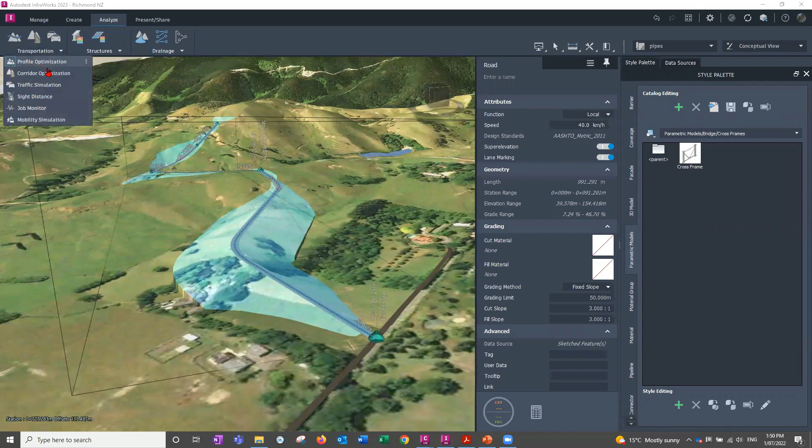When you're looking for those things and you don't know where a command is, there's a new thing as well. It's hidden under the utilities down in here, command search. This is a new one. So if I put in profile, it'll find the profile optimization. It'll also remember the last ones you were looking for as well. So traffic simulation, where the heck is that? It actually just starts it directly from there if you wanted to. So that's under the tools. That's where that's hidden. That's a new thing.

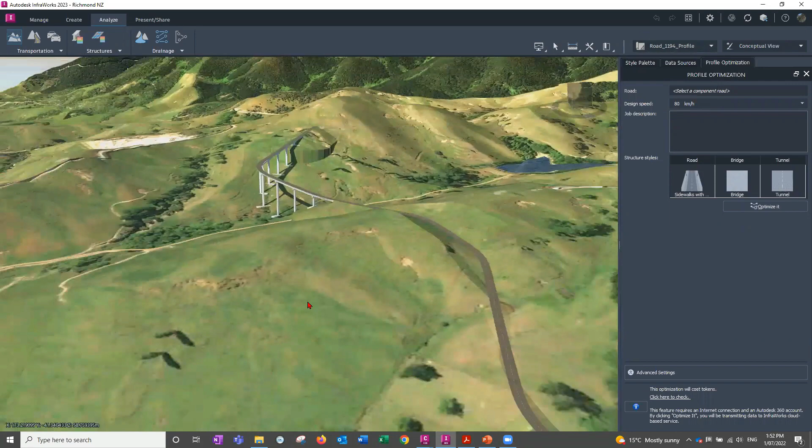And yeah, the profile optimization is new. It produces a report when you do it, and spits out the result to a new, what do you call these things? I've forgotten what you call these things now. Proposal. That's it. Proposal. So it went through, looked at the road that I'd sketched in, optimized the profile based on cost.

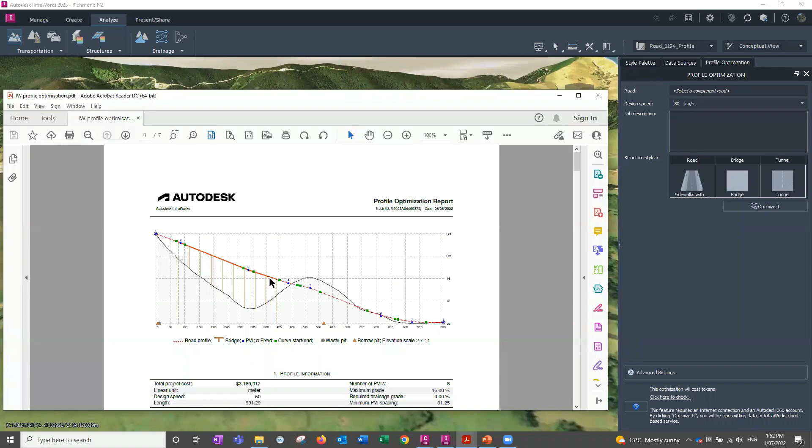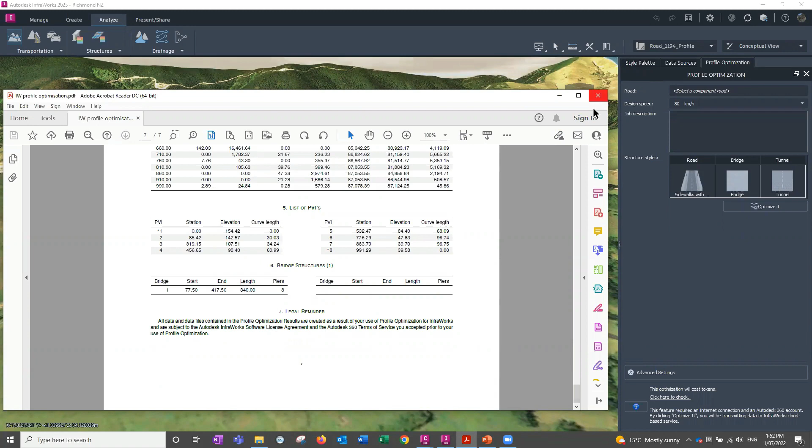So it had a cost in there for cut and fill, cost for what a bridge would cost, and produces a big report for you. Had a borrow pit in the middle here, and then gives you all the information, all the costs it's worked out. I think that's the borrow pit, yeah, the mass haul diagram there, and going on down some cross sections as well, and some volumes down the bottom. Okay, this takes a long time to come back, like about half an hour or so. But that also used to cost, and now that's for free.

Almost up at time now. A couple of other things just in InfraWorks before we finish. In the style palette here, the parametric models. This is where all the bridge components come from. And you could make your own ones in Inventor before. So looking at, say, where are we, piers. These are all the piers. You can make a new one.

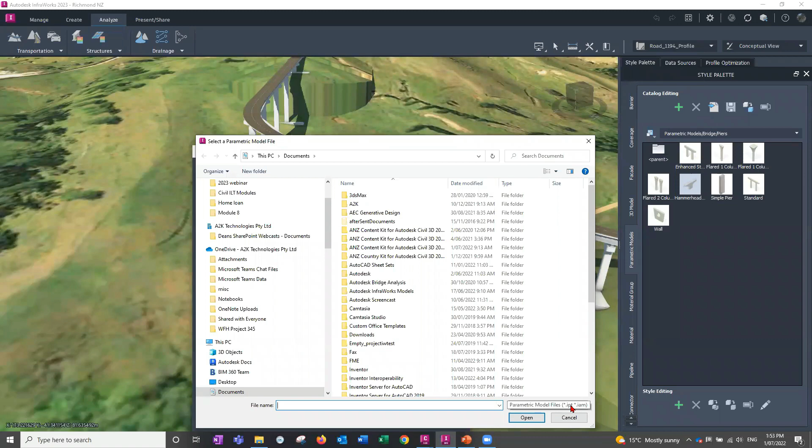And you had to export them from Inventor through the, what's it called, Infrastructure Parts Editor or something like that. Apparently now, when you want to make a new one, it can read directly an IPT file. Which is nice, not having to export it specifically now. I haven't tested that, but apparently that's how it works. The other thing it does is, if you do have your own Inventor part, you apply it to your bridge.

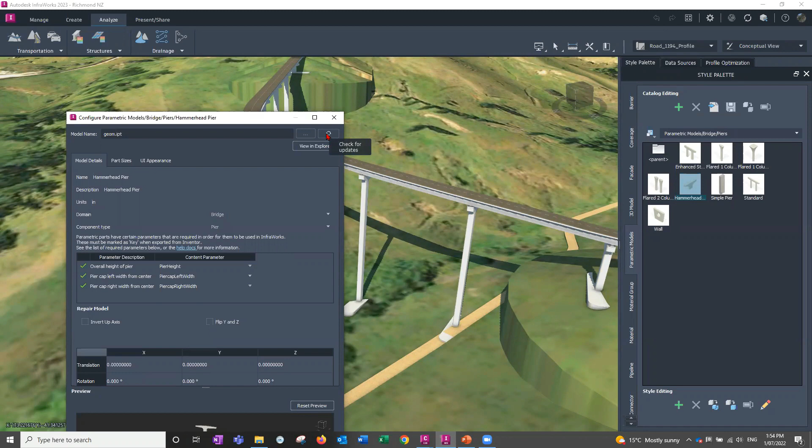You can come back into the properties over in the style palette and there is a little recycle button up here, check for updates. So if you actually change your IPT file, you did something wrong, so you change it, update it. You can just hit this button rather than having to make a new part and replace all the parts in your model. It will just update the part in the style palette on the side, and then update anything that's using that part automatically.

So very steep bridge that, but anyway, the road would have been worse.

That's nice. Some little improvements for those who are actually using this. Many of you won't be. I know just enough Inventor to get myself into big trouble, but little improvements, again, incremental improvements that have been made version to version.

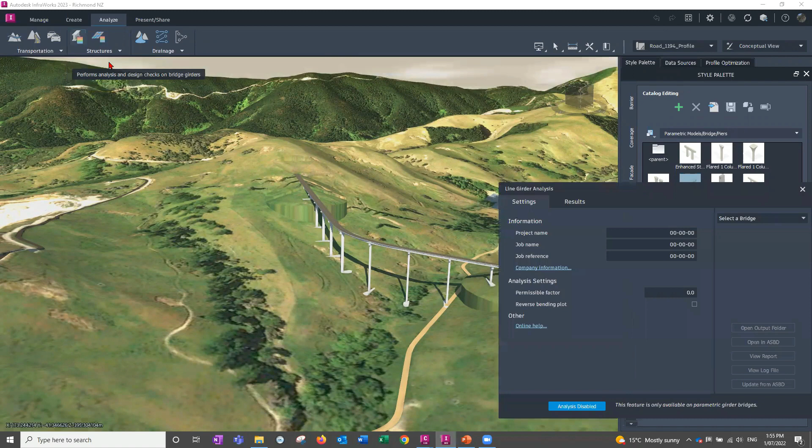Finally, one more thing, again, talking about bridges still, in the structures here, if you're using the line girder analysis and exporting it out to Autodesk Structural Bridge Design, to do an analysis on the bridges that you've been putting in here, or a first order analysis. That's down here, open in Autodesk Structural Bridge Design. There's now an extra button down the bottom here.

So if you actually look at the analysis in ASBD, change something in there, reanalyze it, that's better. You can bring the model back from ASBD and it will update it in InfraWorks without you having to manually do that. So just an extra button there for those using that functionality.

All right, and that is almost exactly top of time, and that is where we wanted to get to. So back into the little PowerPoint.

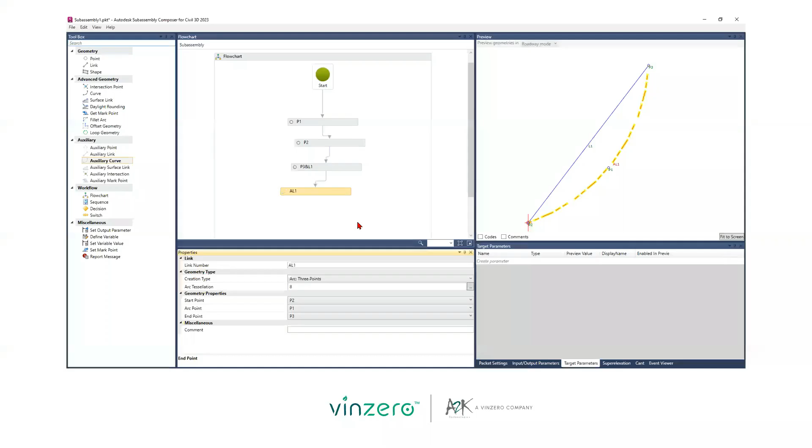Looking at questions, there's a couple of questions here. Somebody's asking if they can save settings when you're extracting the AutoCAD solids, so the corridor solids that I was showing earlier on. Is there a way to save the settings in the template for the layer names? I don't believe so. That's been something I've been wanting as well, but I certainly haven't seen that yet and haven't heard that it's been put in yet, but that would be really nice, I agree.

And can you report drainage pipes relative to a depth range? If you made a surface, I think you can. I think a surface is able to be looked at in relation to a depth range when you've got pipes in the Project Explorer. Not 100% on that. You'd have to have a look, but for many things you can report against the surface. I would think if anything, the pipes would be able to be reported against that.